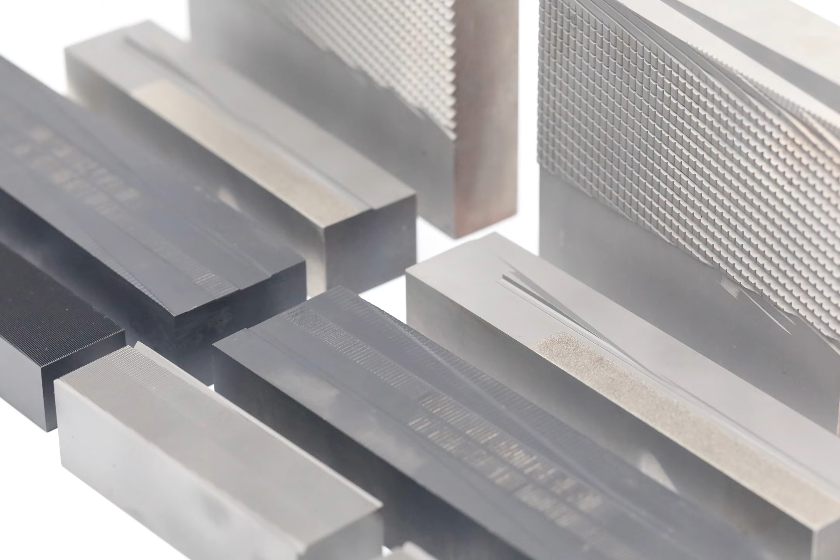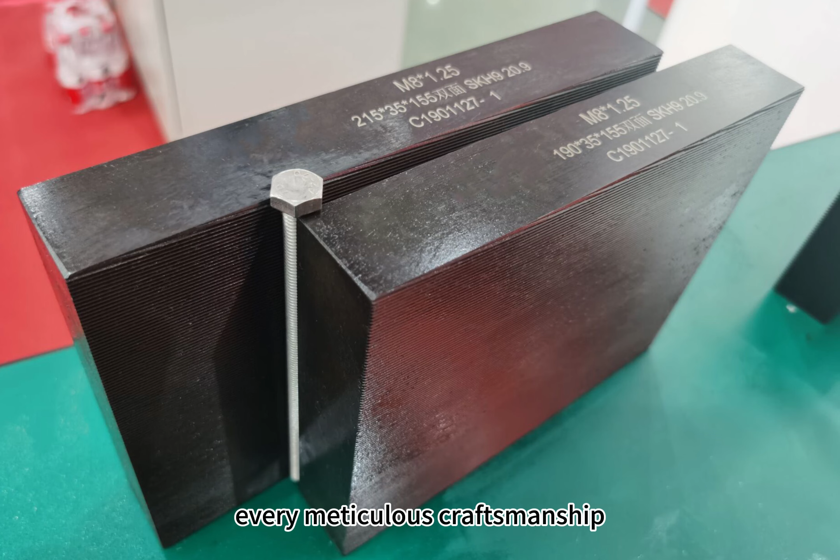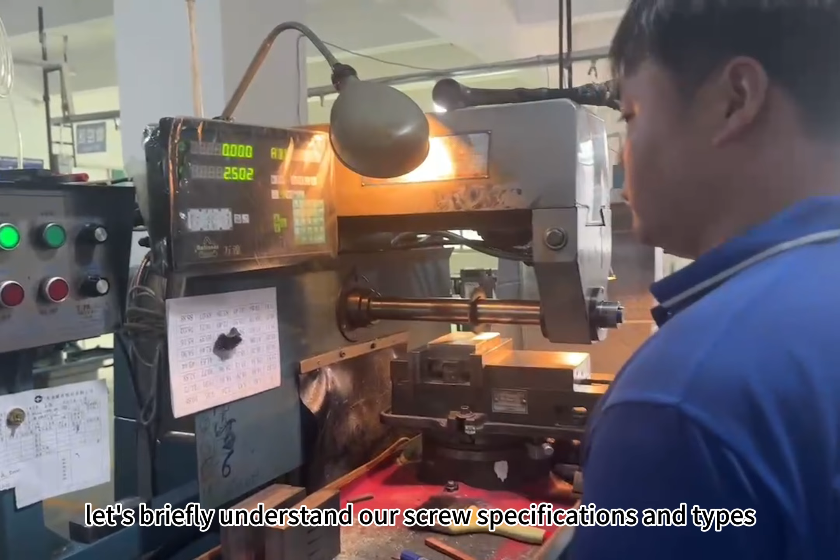In the world of precision manufacturing, there is an indispensable small tool: the screw thread rolling die. It is the nameless hero behind every meticulous craftsmanship. Today, we are going to introduce the screw thread rolling die to you. It is a mold used for forming the threads of screws after the screw heads are shaped. But before that, let's briefly understand our screw specifications and types.

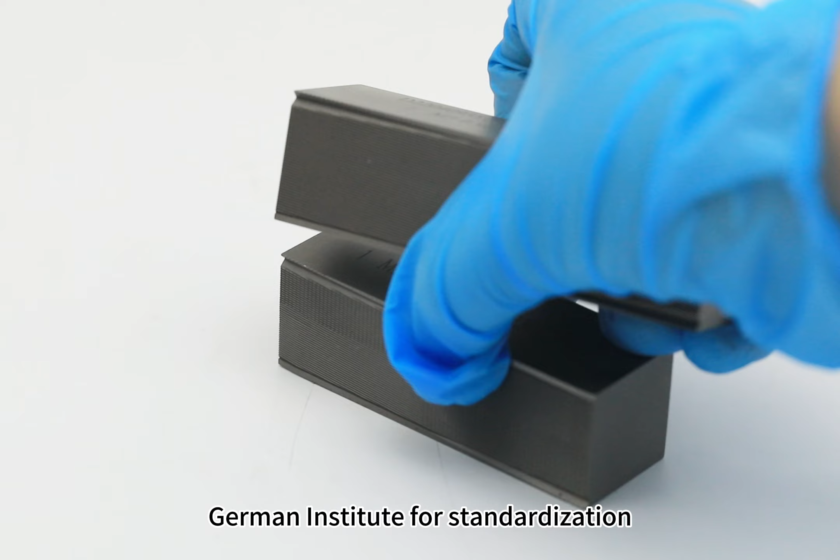UKO's thread rolling die can meet JIS (Japanese Industrial Standard), ANSI (American National Standards Institute), DIN (Deutsches Institut für Normung, German Institute for Standardization), ISO (International Organization for Standardization), and GB (Chinese National Standard).

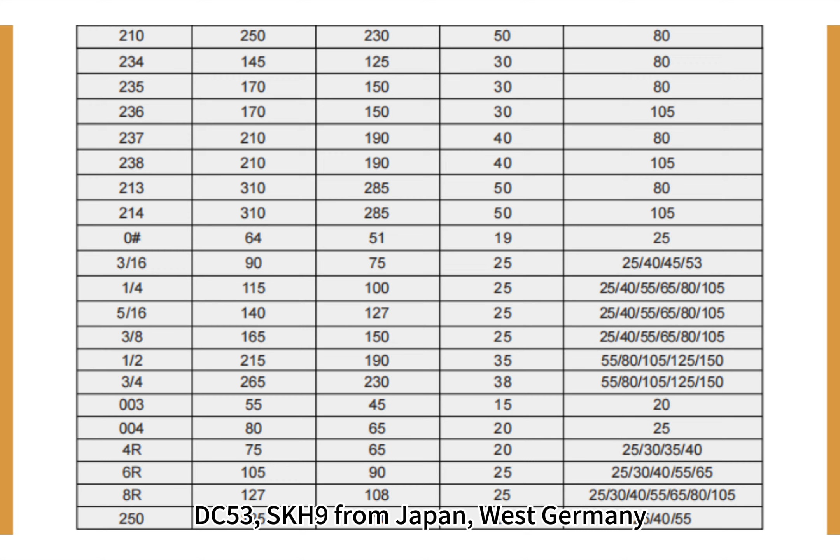The material of the thread rolling die is made of high-quality imported steel such as SKD11, D2, DC53, and SKH9 from Japan, West Germany, Sweden, and other countries. It undergoes pressure cooling and vacuum heat treatment to ensure wear resistance, heat resistance, and good toughness for a long service life.

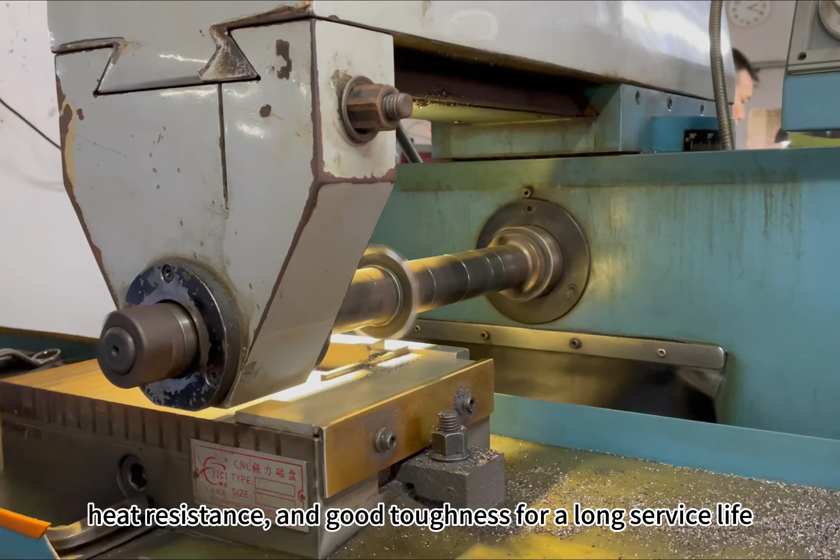The tooth plate made of SKD11 or D2 material requires 3 tempering processes, and the hardness needs to be strictly controlled between 61 to 62 degrees.

The tooth plate made of DC53 material requires 3 tempering processes, and the hardness needs to be strictly controlled between 61.5 to 62.5 degrees.

The tooth plate made of SKH9 material requires 3 tempering processes, and the hardness needs to be strictly controlled between 63 to 64 degrees.

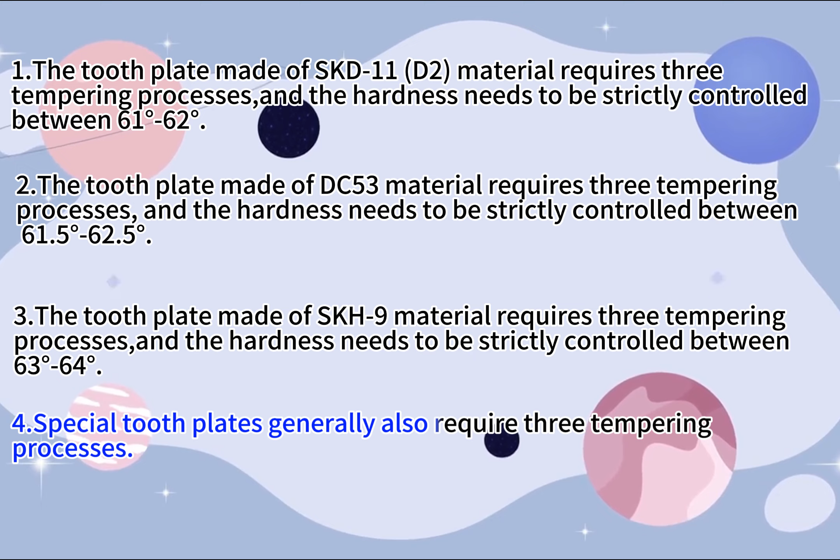For special tooth plates, 3 tempering processes are generally also required. The tooth profile and tip-tail tolerance of the thread rolling die are strictly controlled, surpassing general standards.

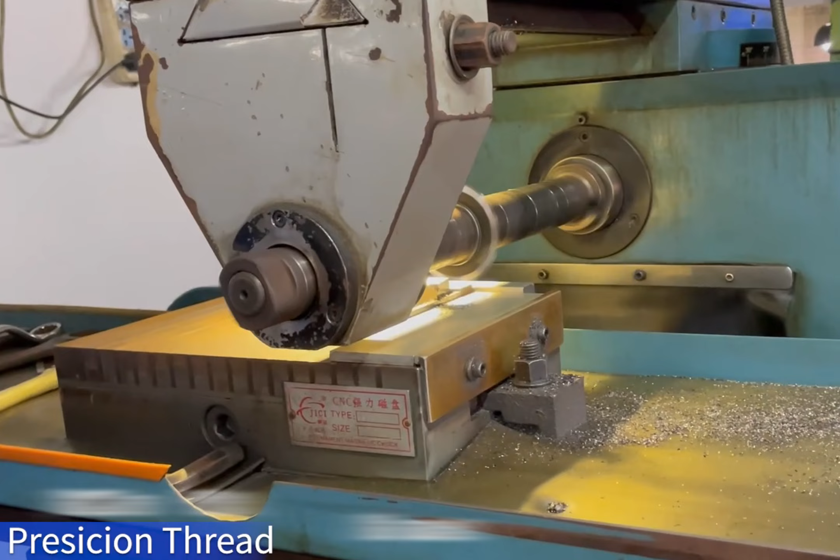Whether it's the construction of a bridge or the installation of a machine, this small tool is indispensable. It is the link that connects every component and ensures the solid guarantee of project quality. So, what data do we need to provide when ordering a tooth plate?